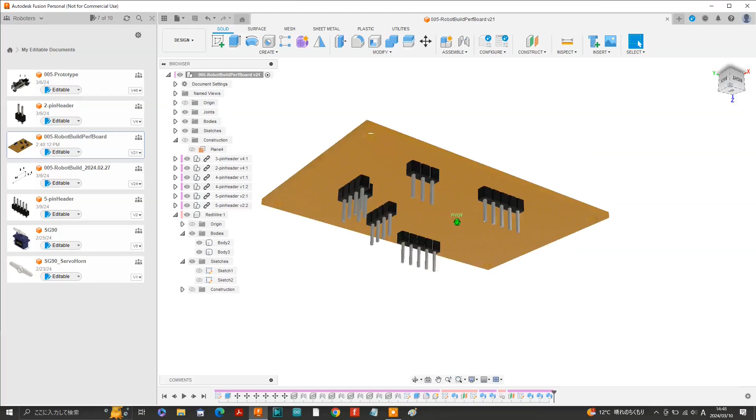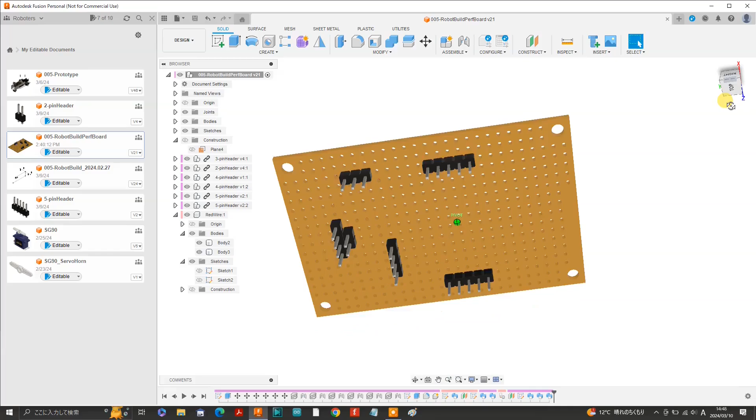Hi, today we're going to model realistic circuit wires in Fusion 360, like these ones here. We'll be connecting two black ground wires, also called earth wires, and four red power wires between soldered pins on a perf board. These are 2.54mm pitch DuPont pin headers already inserted into a 72 by 47mm universal perf board.

I designed this circuit using Fritzing some time ago.

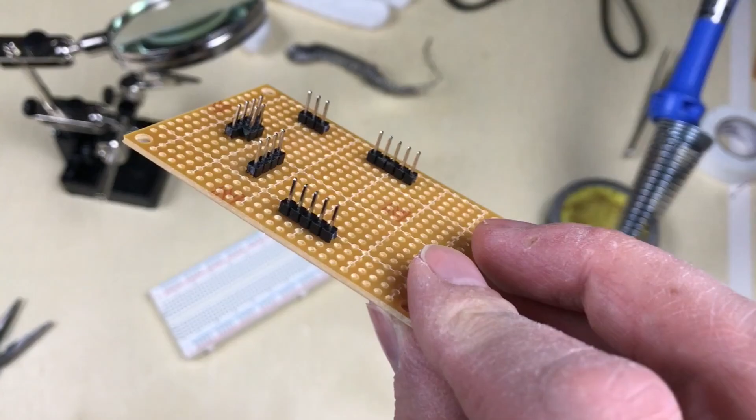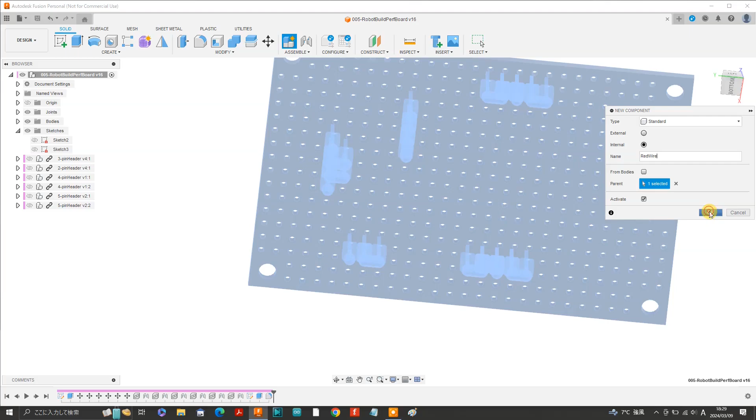Back in Fusion 360 now, the perf board is only showing the soldered points. Let's start by creating a new component, naming it red wire, and clicking OK. To define the wire paths, we use the Fit Point Spline tool. Here I've already sketched the first wire.

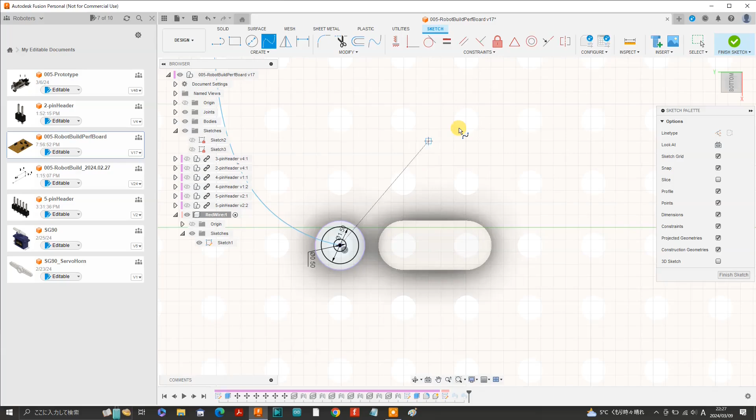Initially I sketched the second wire path by selecting the Fit Point Spline tool, selecting the end point of the first wire path as the starting point of the second wire path, and added a few fit points as I progressed to the target endpoint for the second wire. To adjust the curve, press M for the Move Copy tool and select and move each fit point until the shape of the spline path looks right.

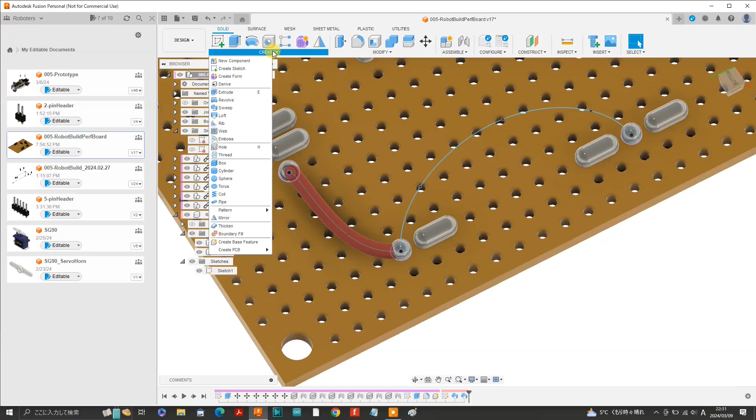All was going well, or so I thought, until I finished the sketch and attempted to sweep along the second wire's spline using the same profile circle shared with the first wire. I selected Sweep from Create, selected the profile circle at the start of the second wire, which is the same as the profile circle at the end of the first wire, then selected the second profile circle at the end of the second wire, and then I selected the new spline path of the second wire for the path.

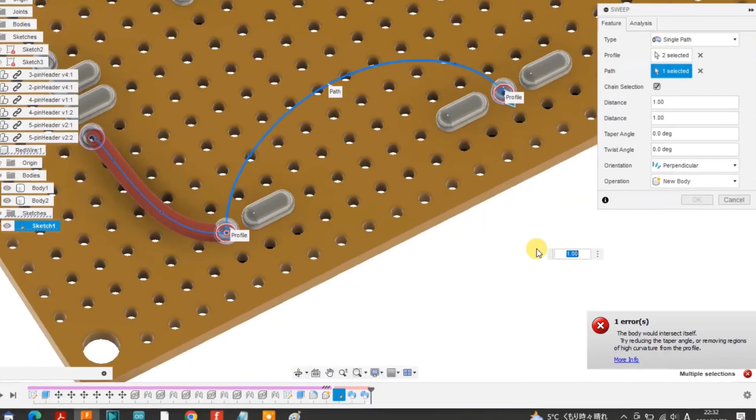When I attempted to perform a sweep operation along the second spline path to form the second wire, Fusion 360 didn't allow it, likely because both wires shared a single profile. It gave an error saying the body would intersect itself. In other words, Fusion 360 seemed to treat the second wire as part of the first. Here's how I worked around this issue.

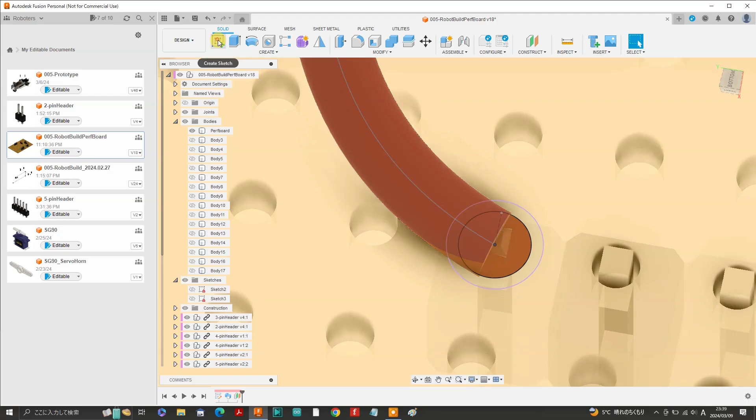With the bodies of the soldering points hidden, I selected the profile circle at the start of the second wire, which is the end of the first wire. From construction, I selected an offset plane, dragged the offset plane away from the profile circle by a small arbitrary distance of 0.4mm and hit OK. This should allow Fusion 360 to give a clean, isolated point of reference to calculate the sweep operation for the second wire. Create a new sketch and select the offset plane we have just created.

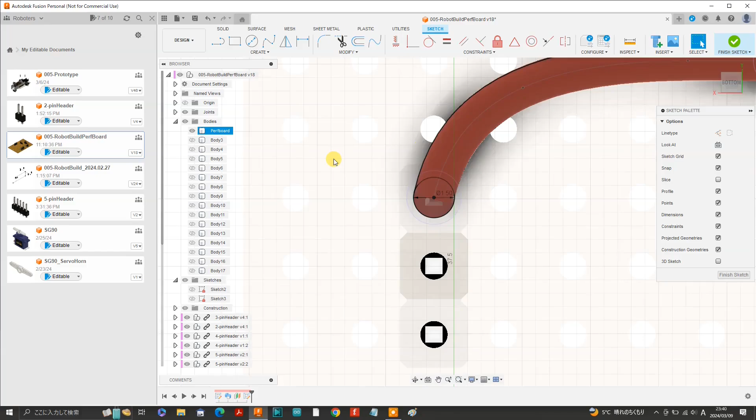Press P to project and project the endpoint of the first wire so that it becomes a separate start point for the second wire. Select the circle tool and create a 1.5mm diameter circle centered at this projected point. We'll just swivel the design around and tilt it at an angle. You can now see the profile circle for the start of the second wire offset from the profile circle at the endpoint of the first wire. This gives us a clean starting point for the sweep operation.

We can finish the sketch and activate the main design. As you can see, I have already sketched the circle centered about the endpoint of the second wire, and I have also sketched a circle for each other connection point of the other wires of the circuit. Let's unhide all the bodies of the soldering points. Let's edit the sketch we've just created.

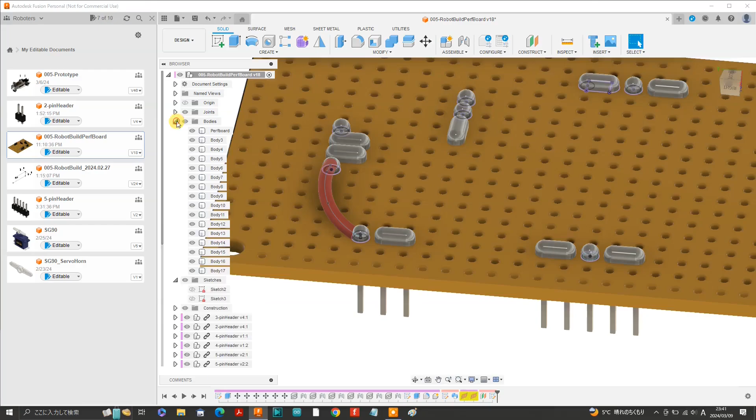For the other end of the second wire, press P to project and project the center of the endpoint of the second wire. I could have just projected the circle that has already been sketched on the other sketch, but for some reason I sketched a new 1.5mm circle, which is okay too.

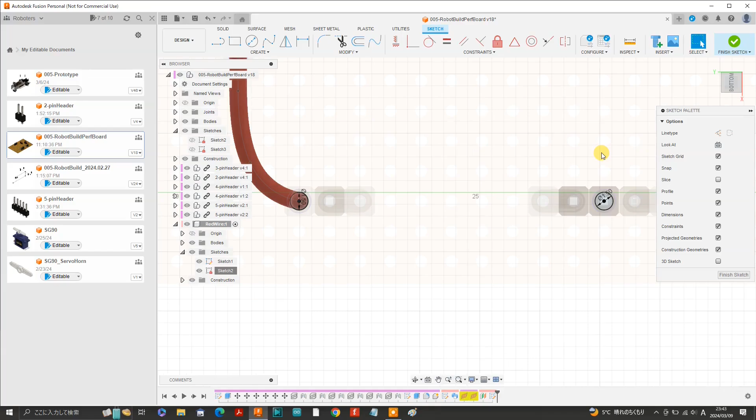Now we can select the Fit Point Spline tool and sketch a spline while creating fit points by clicking the mouse. And then finally select the end point and finish the line by selecting the check mark. Please note that this spline is not constrained because there's no real need to constrain it.

Turning the design on its side, we can see that the spline is lying flat on the offset plane. So press M for move, copy, and move the fit points upward to make the spline curve upwards as well. Select a fit point and move one of the arrows like so. If you select another fit point, the manipulator jumps to that new fit point.

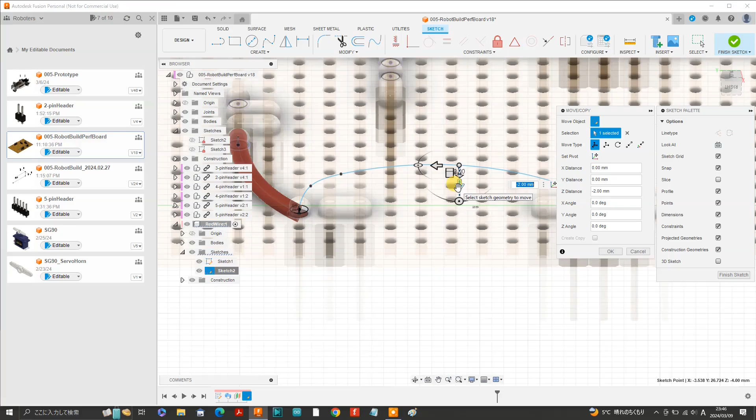Carry on adjusting the fit points while viewing it at different angles until you get the shape you want. Also, another way to move a fit point is to click on it first, right click, select move copy, and then move it to a desired position. Once we have finalized the shape of the spline path, we can exit the sketch mode by selecting finish sketch.

Now for the exciting part, creating the wire itself. From create, select sweep, select the first profile circle, the start of the second wire, then move over to the second profile circle and select that too. In the sweep palette, you will see that the two profiles have been selected, which is good. Hit select on the sweep palette and select the spline for the path.

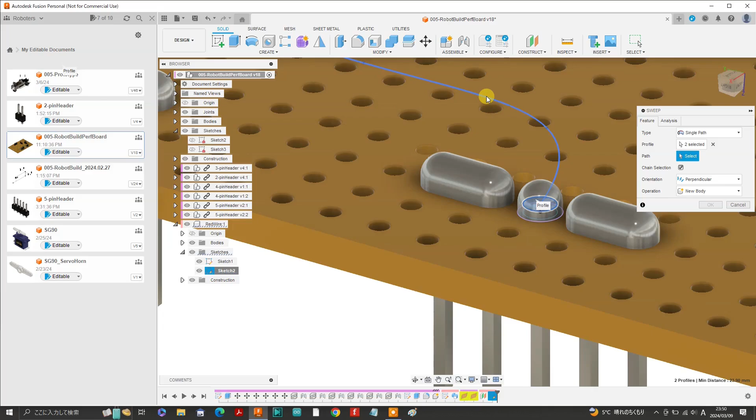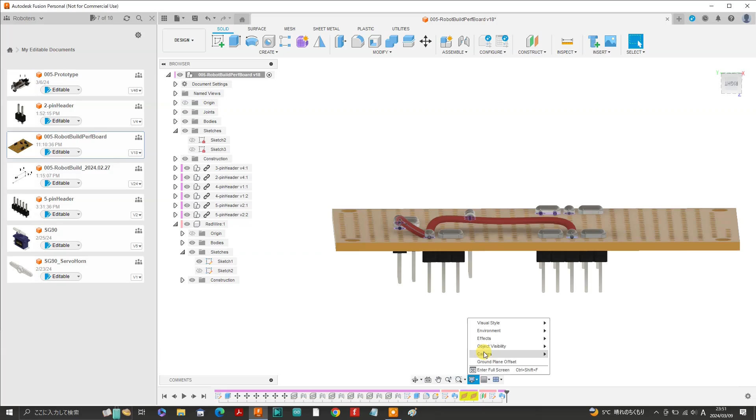We can see that the wire has been created, but the operation is set to cut. So let's change that to new body. And there it is, the second wire. Let's color the wire by pressing A for appearance and then dragging a red pigment onto the wire body. Looking pretty good. Let's switch from orthographic to perspective for a more realistic look.

I essentially use the same method for creating the remaining wires. For this third wire, I sketched out a spline path in an S shape. I forgot to activate red wire before sketching it, so this wire is part of the main design. Not a major issue, but it means editing needs to be done through the main folder.

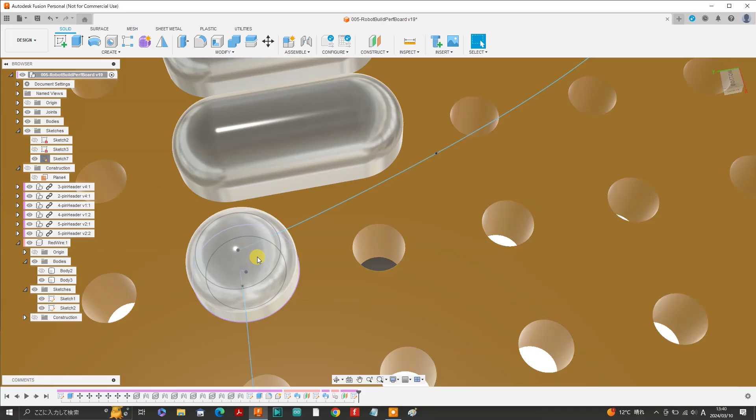Zoom up to the first solder point of the third wire. I can't seem to be able to select the circular profile for the third wire because of the solder point, so let's hide that. There we can see the profile circle and that it has been nudged upward from the other profile circle belonging to the first wire by using an offset plane as I showed you earlier on.

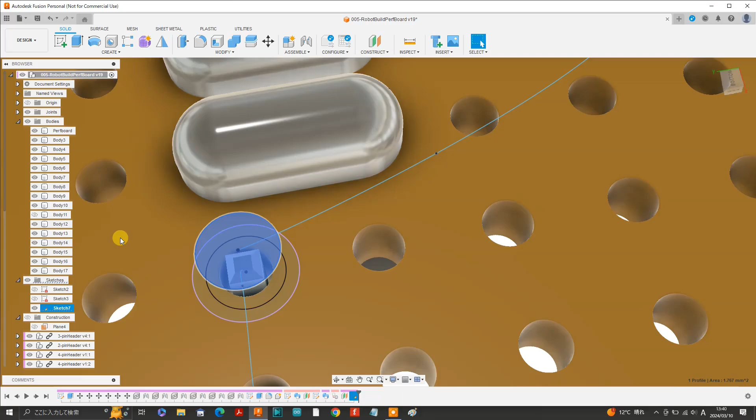Go to create and select sweep, and we can see in the sweep palette that one profile has been selected. Now proceed to move over to the end point of the spline path of the third wire, but it looks like I haven't sketched or projected a circle for our endpoint profile, so let's do that now. I sketched a circle on the offset plane centered about the endpoint and finished the sketch.

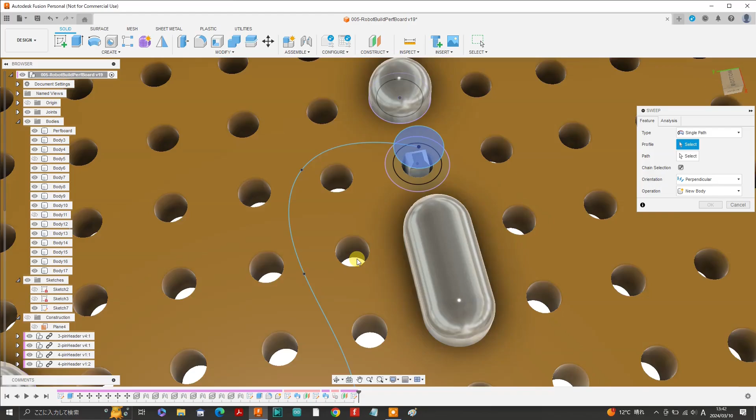Select sweep from create, select this circular profile and then the other circular profile at the other end of the spline, switch to the path and select the spline itself, and there the 3D model of the wire appears. Let's add a red pigment for the newly created third red wire.

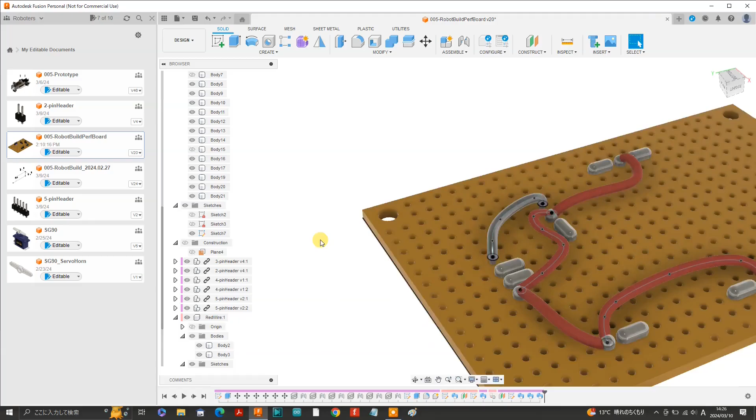And really it's just a repetition of the same procedures for each wire that you want to create. I created the first and second black wires according to the exact same technique. And there we have our 3D model of the black and red wires of the circuit.